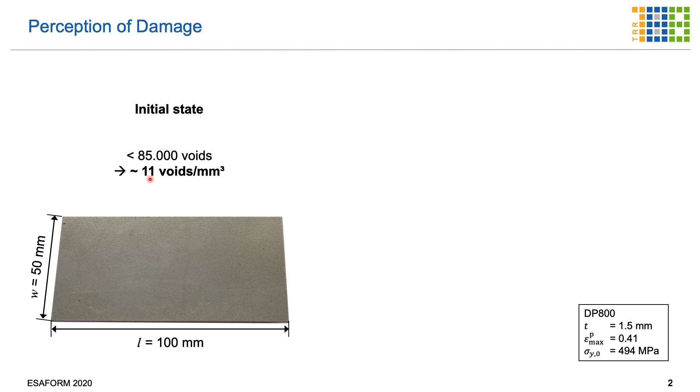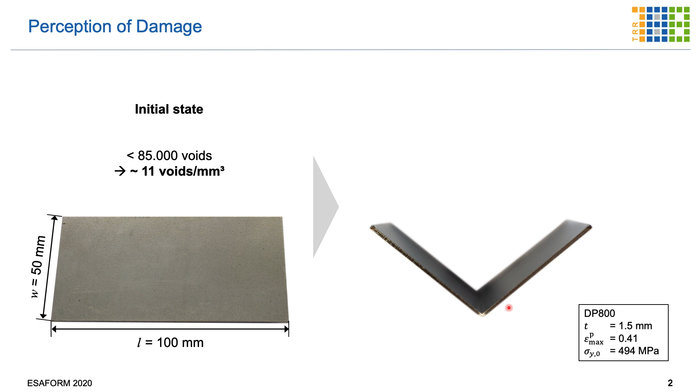Now the question is, what happens to those voids if you do metal forming? If you do, for instance, air bending, how many voids will be generated in the forming zone? The strain we generated in the experiment was 0.41. If you look at the forming zone, a tiny zone, you will find 27 million voids, corresponding to roughly 390,000 voids per millimeter cubed, just in the forming zone. This is 35,000 times more than at the initial starting point.

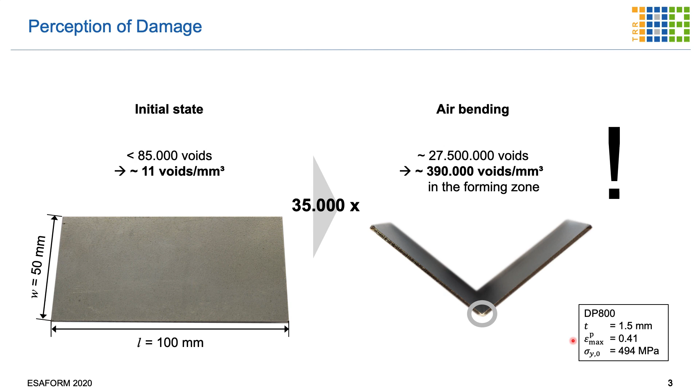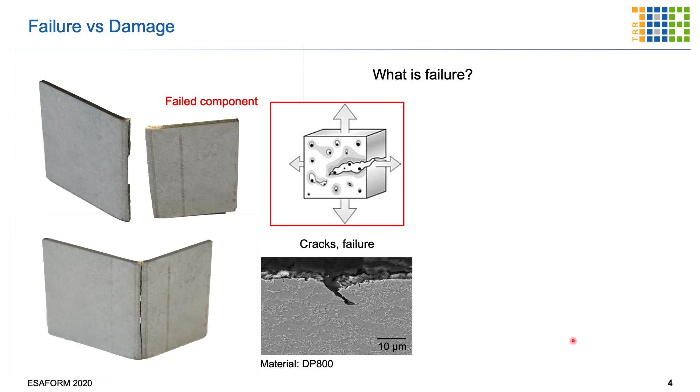So something happens here, and this is what we call the evolution of damage. At that point, I would like to emphasize the difference between damage and failure. Failure is when we observe macroscopic cracks that lead to the malfunctioning of the component, so the component has failed and cannot be used in service. This is what we understand by failure.

However, if we look at damage, we start with a material which might have some voids in it, but which might also have inhomogeneities such as precipitations, inclusions, or even second phases. As you start loading and plastically deforming, you see separation at those interfaces happen, and those voids grow with increasing plastic deformation.

At the end, those voids coalesce with neighboring voids and coalesce further until macroscopic fracture occurs. Our concern is up to this red line: this is the part of the material we consider to be a functional component. Although there are voids in it, although they coalesce, and although it's not in the initial state, this part is still a good part. In our example, we can find at the martensitic islands voids that grow with plastic deformation, as you see here very impressively.

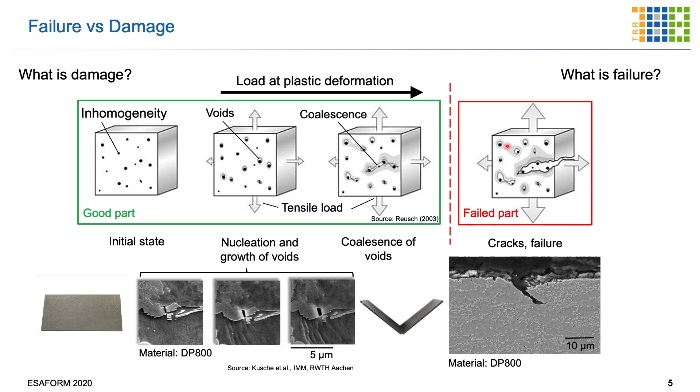In the end, our message, our mission, is: damage is not failure. So you might have damage in the part, and still it's a good part, but we are not looking at a part that goes to failure. Failure is the final stage of the evolution of damage.

So this brings us to a paradigm change in a way. The design process consists of getting input on material properties, the function of the component, the load in service, and then designing the geometry of the component from those, and then manufacturing the component. Now, the properties after manufacturing are usually not the same as the properties assumed at the beginning, so therefore you get a loss of safety margin.

You have a part with an unknown safety margin. You can improve that if you use the product properties after manufacturing in the design process. Then your safety margin will be much better, and it will be a deterministic safety margin. Until now, the properties considered after manufacturing are strain hardening and residual stresses. Damage, which I showed you before, is basically not considered. And that's what we would like to change in our research center.

The important message here is we would like to move from formability in forming, which looks for preventing cracks in forming, to usability—that means to produce good parts but with low damage value that have much better performance.

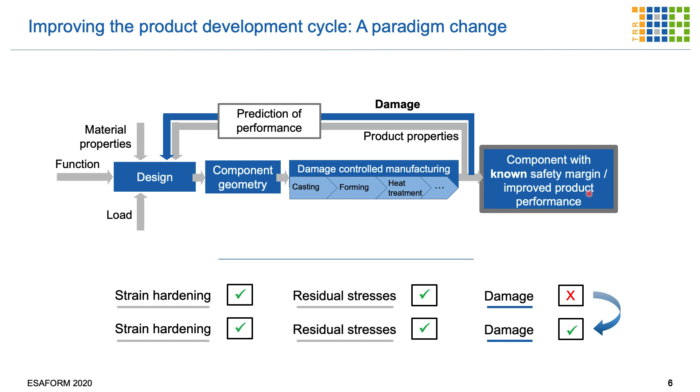Let's turn back to our first example with the bending. If we replace this air bending process with one where we superpose pressure during the bending process in the deformation zone, for instance by an elastomer cushion, we can reduce the voids from 27 million to 15 million during the forming process. It's the same product, same geometry, same material, but the voids are significantly less—about 45% less. Especially if you look at the density, which reduces from 390,000 to 210,000 voids per millimeter cube.

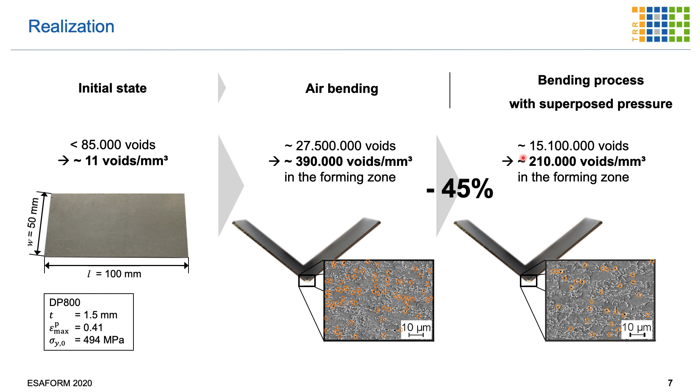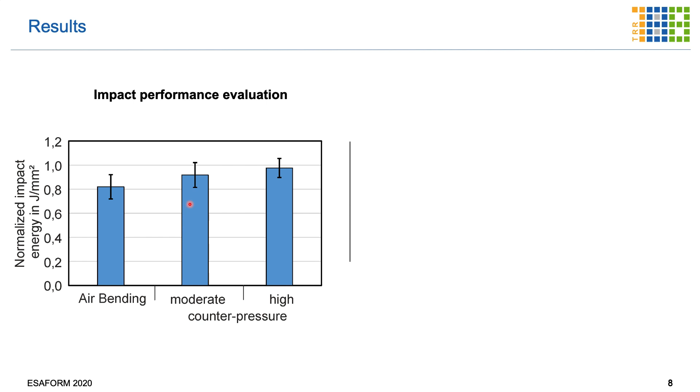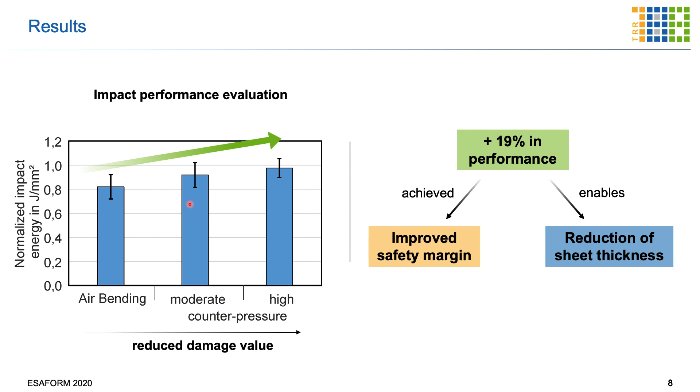So this is our mission, this is our vision of damage in metal forming.

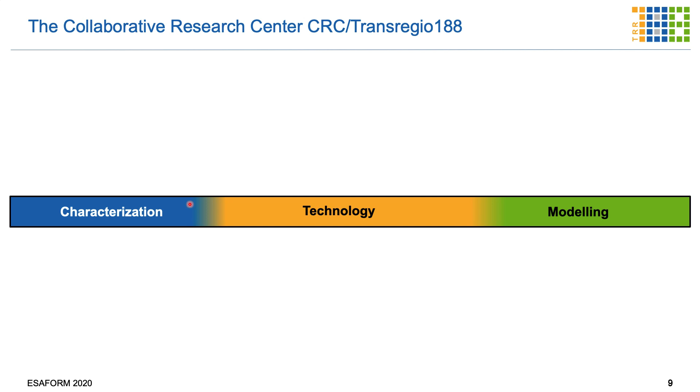The Collaborative Research Center, Transregio 188, has three fields of research within its body: the characterization field, the technology field, and the modeling field.

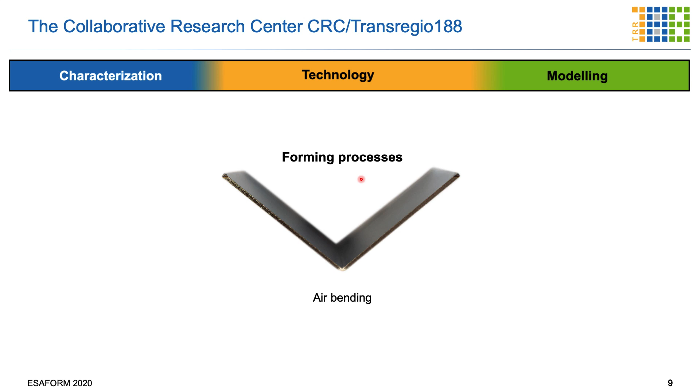In the technology field, we are concerned with the metal forming processes themselves, like air bending, extrusion, rolling, deep drawing, and similar processes. In the characterization area, we look at quantifying the damage level on a microscopic level, by measuring densities and so on, and at the same time we quantify the performance of the part. In the modeling field, our aim is to predict the development and evolution of damage during metal forming, but also predict the performance of damaged parts in service life.

So this is the global view of the activities of our research center, and I would like to give you a little bit deeper some findings of what we have achieved in the last 3 years.

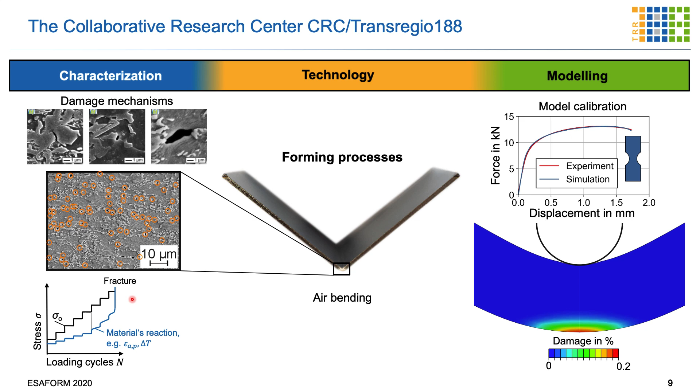Before I do that, let me introduce briefly the research team. We consist of four places in Germany: in Dortmund we have four institutes working together, in Aachen we have 5 institutes working together, in Cottbus 1 institute, and 1 department in the Max Planck Institute. Altogether we are 18 PhDs. We have 19 leading researchers—supervisors and senior researchers—and 14 industrial companies who support us in conducting the research and show us the industrial relevance of our research, giving us valuable guidelines.

The first funding period started in 2017. We are almost at the end of this first funding period, and what I will present today are some of the results and findings within the last 3 years.

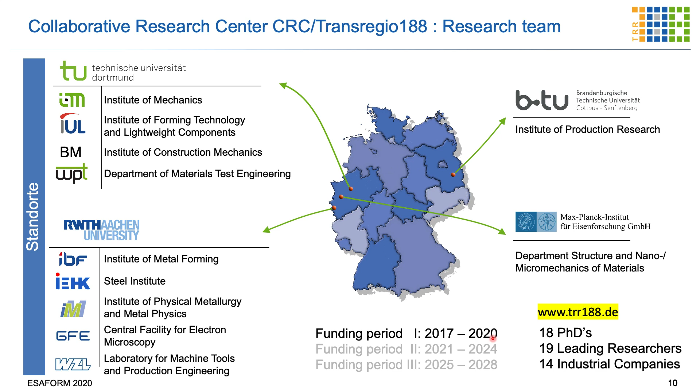Let us come first to the manufacturing of semi-finished products, which goes through the hot rolling and cold rolling routes and heat treatments. This is a typical forming route for sheet metals. We start with continuous casting, heating, hot rolling, cold rolling, heat treatment, and then the processes of bending, deep drawing, and so on start until we end up with the component and check its performance.

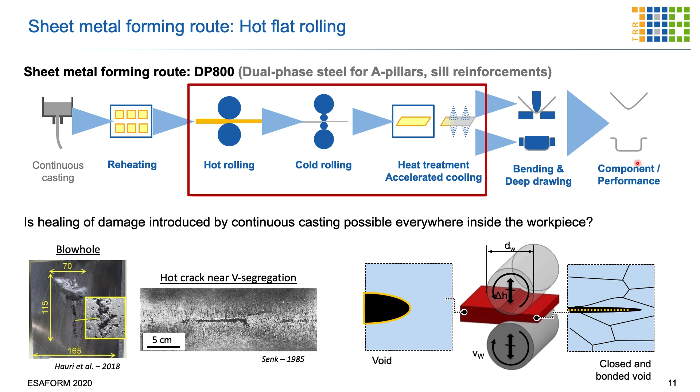In the field of flat rolling, we analyzed in the first period of our research how the voids which are inherently present after casting close during the rolling process. What we found is that the type of the voids we have after casting, their form, their direction, their orientation has an immense effect on the closure of those voids during the flat rolling process.

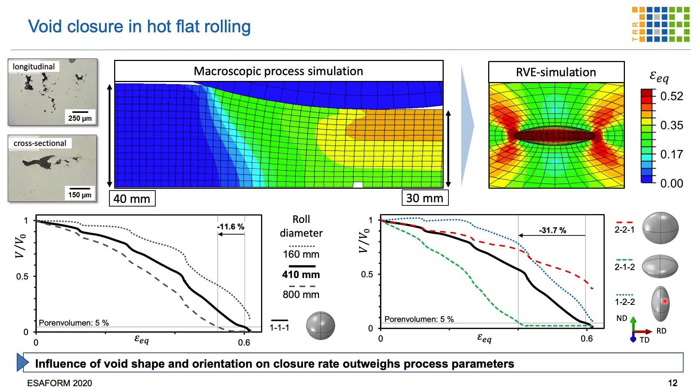And you see at the center you have a closure of that void to a certain extent. And in those graphs, with increasing strain we see different closure speeds of those voids depending on their geometry and depending on their orientation in the metal. So this was a very important finding for us.

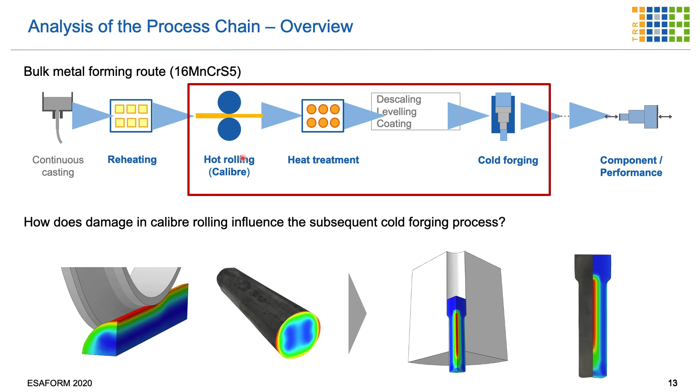In a second investigation, we looked to the bulk forming route, and in the bulk forming route we considered the hot rolling within a caliber rolling process. So what we did is we were searching for the amount of damage depending on the design of the caliber rolling process.

So we started with a rod which has 60 millimeters diameter and reduced it to the diameter of 40 millimeters, which was used then after in the cold forging process, and looked for different ways of designing the sequence of the calibers. Here you see different forms, and at the end the amount of void volume fraction in the part.

So, depending on which route you select and which geometry of the rolling tools you select, you end up with different damage distribution in the part. The volume void fraction is relatively low after the rolling process, which is a good sign for the process itself. So this was another important finding for us.

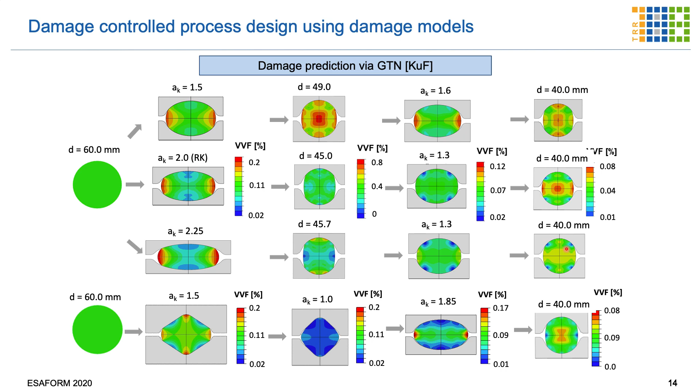Now, let me come to the component manufacturing. I would like to start with cold forging. The cold forging process is a very simple and fundamental process in bulk forming, where you start with a billet and push the billet with a punch through a die opening in order to obtain the extrudate.

The important process parameter here is the so-called extrusion strain, which is nothing else than the logarithm of the initial cross-section divided by the final cross-section A1. And interestingly, this strain is exactly the strain you get with local analysis at the center line of the extrudate.

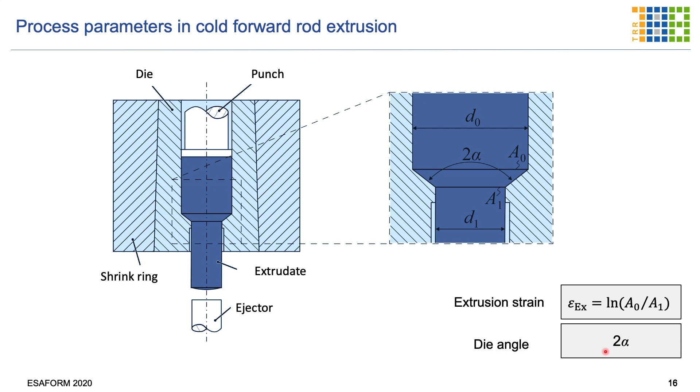And this strain is constant over a certain radius, so that we could take specimens out of this region and analyze them further. Another important parameter is the die angle, designated by 2 alpha, and I would like to show you now the experimental campaign which we have conducted.

So on the left you see for a material, 16 manganese chrome S5, which is a typical cold forging steel, we use different strains from 0.5 at the axis up to 1.5 logarithmic strains. So we are speaking here about very, very large logarithmic strains. And all of them for a constant die angle.

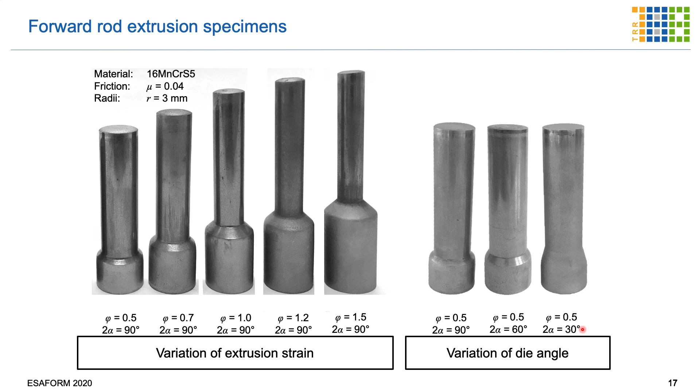And then, as an alternative, we produced a series of experiments with the same strain, that means with the same cross-sectional reduction, however with different angles of the die. And now let me show some results.

So what we found is, if we analyze the stress state and look for the triaxiality -- which is the hydrostatic stress divided by the equivalent stress, a measure of the first invariant in the stress tensor -- we see that for the same cross-sectional reduction, that means for the same plastic strain at the center, we get different triaxialities for different angles.

So with a 90-degree angle, we get the maximum triaxiality in the deformation zone as positive, which is 0.2, and we get a triaxiality of almost minus 0.3 for the smaller die angle of 30 degrees.

This is very important. And now we look to those three specimens and found that the density for the one with the highest hydrostatic pressure is highest. That means the voids which we have in the specimen closed very effectively, or didn't open at least.

And then for the case of the 90-degree angle where we have a positive triaxiality, we get a reduction of the density, which indicates that we have here damage nucleated and growing during the deformation process. So this is a very important result.

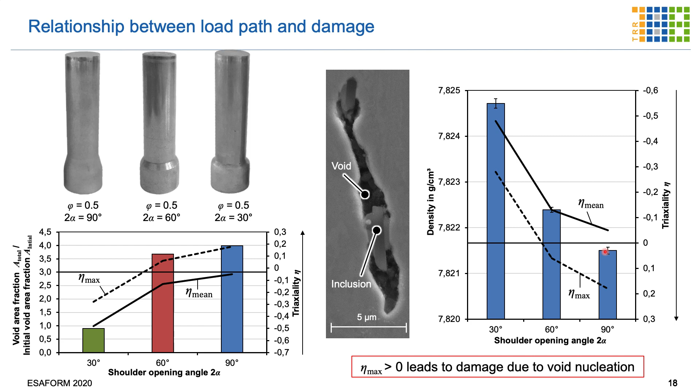As a next step, we analyze for those specimens the product performance, and for that purpose we use specimens out of the extrudate in the middle with almost uniform homogeneous material properties, and extract fatigue test specimens. We extract Charpy impact tests and we extract tensile test specimens to analyze the apparent Young's modulus.

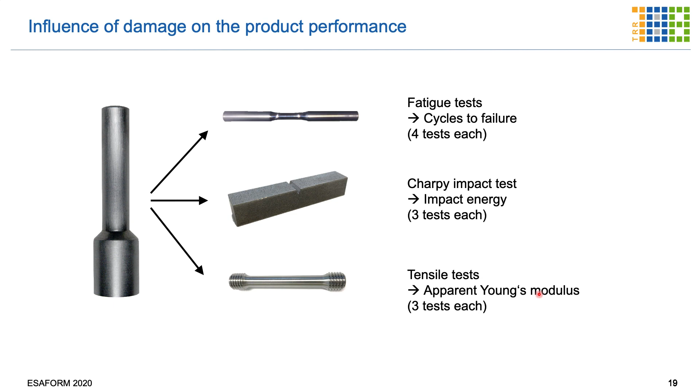And those are the results. So this is a quite crowded figure, so please concentrate on, for instance, the impact energy. That's this one for 30 degrees, where we have a maximum triaxiality, shown here, of a negative value 0.28.

For that, the impact energy is the highest, and the impact energy falls for the specimen with 90-degree angle for the same strain. So strain hardening is not the factor, and residual stresses are not the factor, because you have almost no residual stresses in the core of the part after extracting the specimen.

So at the end, we can show that the impact energy of this part improved with decreasing cone angle, improved with increasing triaxiality in the negative direction.

So then you have the apparent Young's modulus. It decreases with increasing cone angle, from about 195 gigapascal down to 185 gigapascal. So there is an apparent decrease in the Young's modulus, which means you have a loss of stiffness with increasing damage at 2 alpha 90 degrees. And the same for the fatigue life, as you can see here.

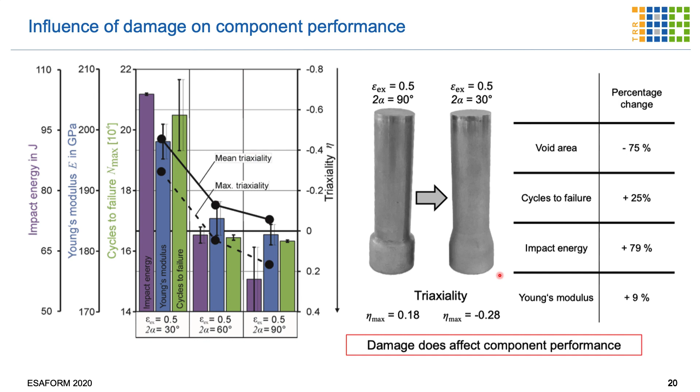I would like to show you another example from our findings in the field of air bending. We found that in air bending we cannot change the parameters like in extrusion by just playing with the bending parameters. The triaxiality doesn't change significantly, so we had to introduce another methodology, which was to apply external pressure during the process.

One very well-known procedure in industry is to use an elastic cushion for that purpose. But we found that this doesn't generate predictable pressure on one hand, and on the other hand, it does not generate high enough pressure for the process. So we invented a new bending process, where you see here the details.

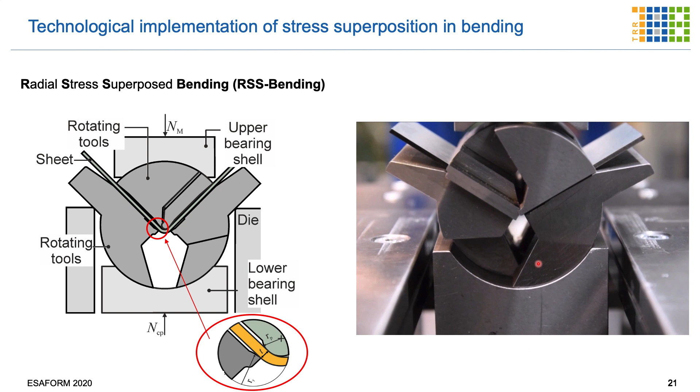So the dies are rotating. I will show you the slide in a minute. If you look closely to the contact area, we produced a pressure during the free bending action through that force on the lower die. And you see here the tool in action. That's the sheet, and you produce the pressure by pushing that lower die, ending up with a pressure superposed bending process.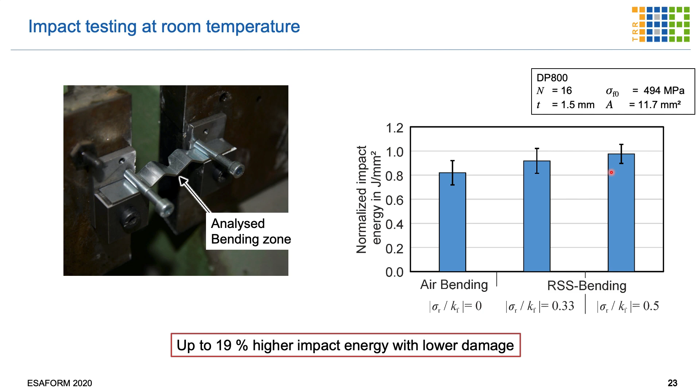What we found is that for a steel of DP800, we have an increase in the normalized impact energy with an increase of pressure. Here you see the approximate pressure values, where Kf is the flow stress. If we apply a pressure which is one-third of the flow stress, we have an increase in impact energy by almost 12%. And if we increase the pressure to half of the flow stress, we can increase that even by 20%. So this is a very important finding and a very clear message for the future of the design of metal forming processes.

Here is another example from the sheet metal forming part. This is from our colleagues from WZL in Aachen, the deep drawing process. What we try to do here is look at changing the load path during the forming of a part that looks like that from the blank. The blank is the same, the finished part is the same. What we change is whether we do it by one-step deep drawing, or by a multiple step drawing.

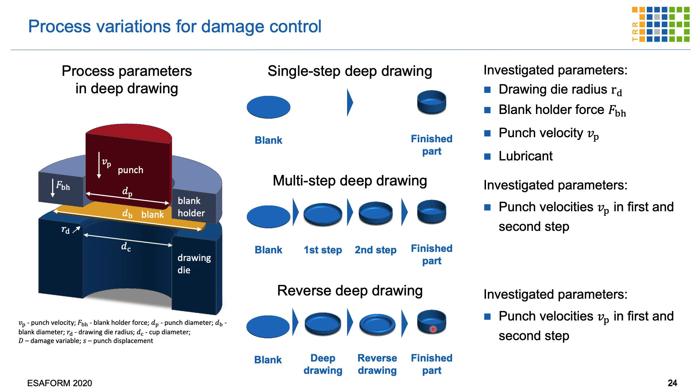So first draw one cap, then redraw it, and then redraw it again to end up with the finished part, or redraw by reverse deep drawing—deep draw one cap, redraw it in a reverse sense, and then redraw it again to end up with the same cup. Our hypothesis is that by changing the load path, we change the triaxiality, and by that the damage level in the part.

Here are the results. Now consider this right figure. This is the single-step deep drawing process, the multiple-step forward process, and the reverse multiple-step deep drawing process. What we see on these figures is the damage distribution, and you see that the multi-step process brings damage at a different location than the two other ones.

So this is the maximum damage in the wall at this point. However, if you use the reverse one, you get the maximum damage at another position in the wall, and if you use the single step process, you get the maximum damage at another position. More importantly, in the transition part where you have critical loadings of the part, the single step process delivers the worst damage compared to the two others.

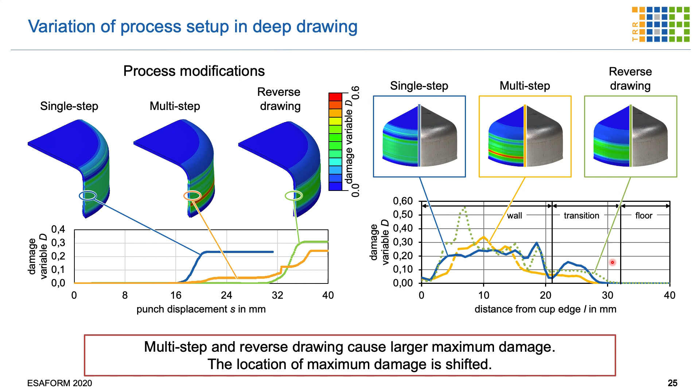So by that we could also prove our vision that we can change the product property damage in the part by changing the path of the loading.

Now, in the next slides, I would like to show you some results about our modeling and characterization. One important finding in our research center in the first period was that material property identification is an important issue. We found that if we use the classical strategy for damage models to identify material parameters by the load displacement curve or plus some strain values, you end up with damage values which are not in accordance with our experimentally measured damage values.

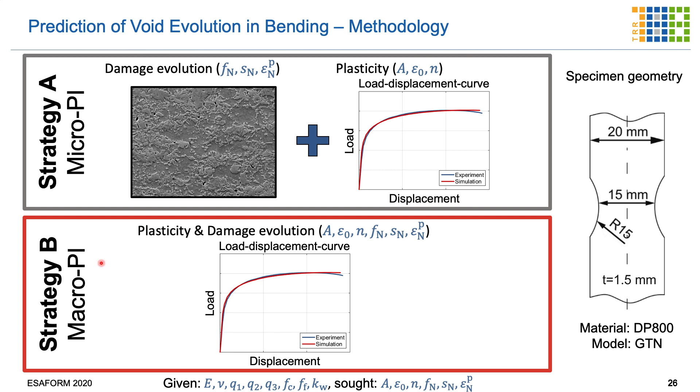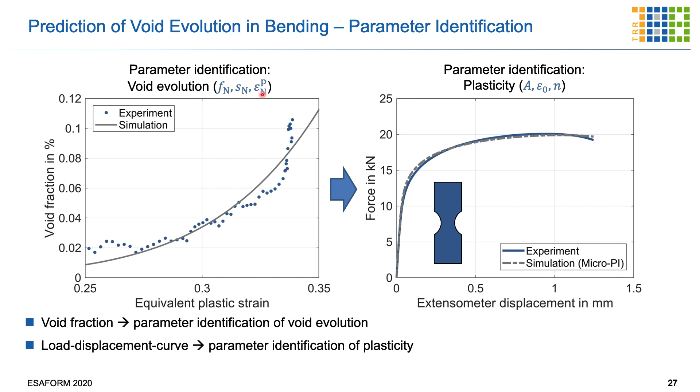And here you see the procedure. This is the parameter identification of the plasticity part of our model, where we identified the plasticity parameters, and this is the parameter identification strategy using the void fraction or the equivalent strain, identifying the void evolution parameters in a Gurson model. The results are shown here.

So if we consider the bending process with a macro parameter identification method, which is the classical one, and with the micro one, you get completely different void fraction distributions. As you can see here, the factor difference is 35.

Here is the distance from the outer radius, so we start at this point and go inside and measure the void fraction. If we use the macro parameter identification strategy, we get values - please notice the coordinate system is cut at this point, so you have a jump here to values of 7%. If we measure them experimentally, we measure values of 0.2%.

So there is a huge difference between the macroscopic parameter identification with the same model, the same Gurson model, just depending on how you determine the parameters of the model. And if we do it with our micro parameter identification procedure, we get not exactly the same as the experiment, but at least the order of magnitude is very similar to the experimental ones.

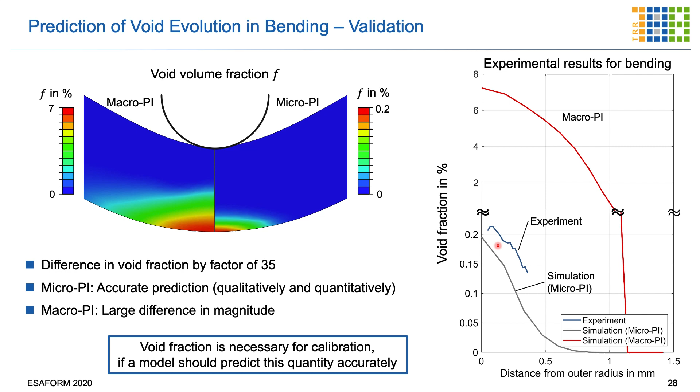So in the next slide, I would like to show you some interesting findings on how we try to identify the mechanisms of damage which we use to feed our models and design our models accordingly.

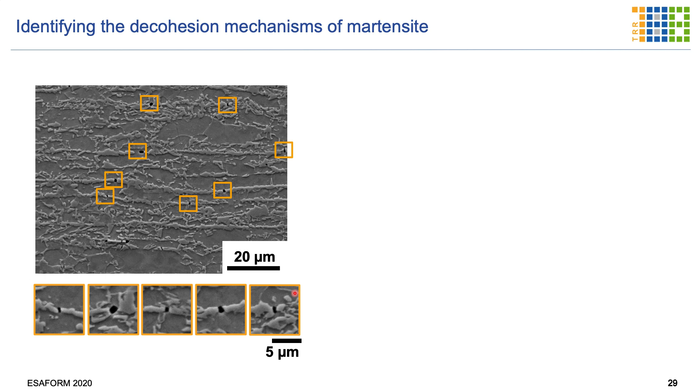So one example is about the decohesion mechanism of martensite. How do voids occur? You see here some voids. How do they occur by the decohesion of the martensite from the matrix? For that purpose, we look at the voids as shown here, different voids, and then analyze how those voids get larger and increase in size.

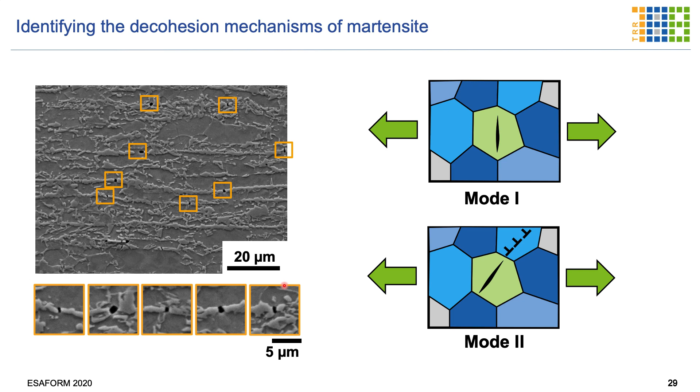So there are two modes, mode 1 and mode 2, and those two modes are important for our models. What we did was analyze those modes under the microscope and found that in the uniaxial tension test, this mode 1 direction, which corresponds to 90 degrees, this is the cracking angle, is the basic mode we have in the cracking of the martensite.

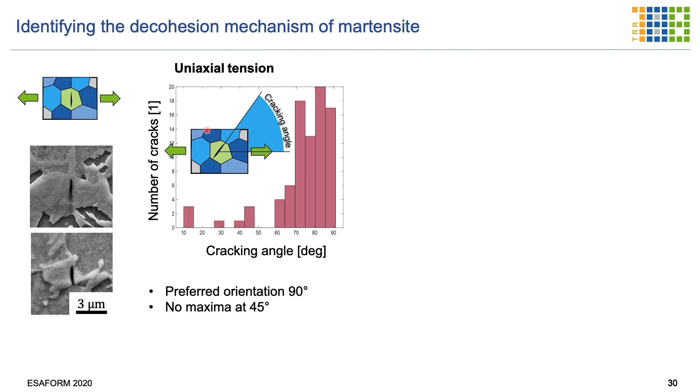Here is the angle once more shown. The preferred orientation for cracking in uniaxial tension is the 90-degree mode. If you look at equi-biaxial tension, the situation changes - then any angle, any orientation can be a cracking orientation. So it's very important that we identify those mechanisms in order to use them in our models.

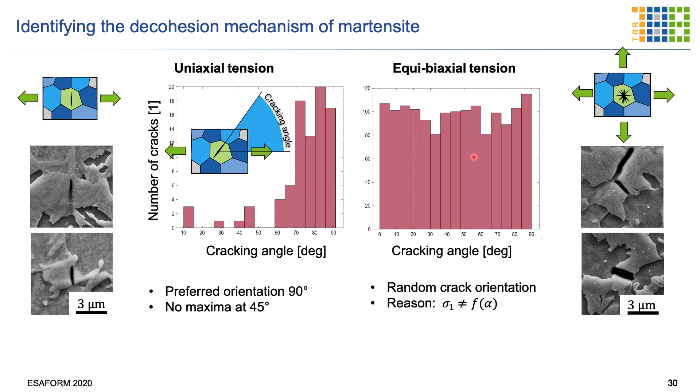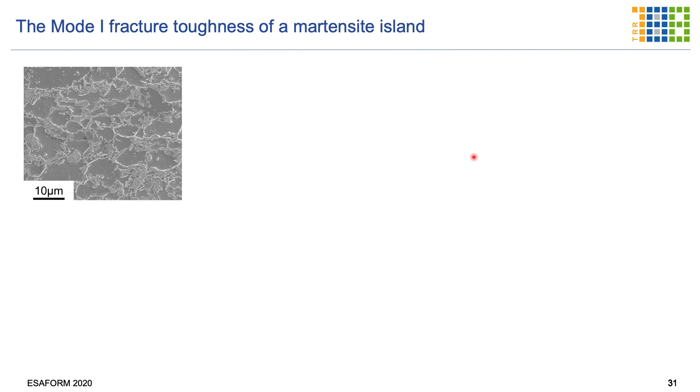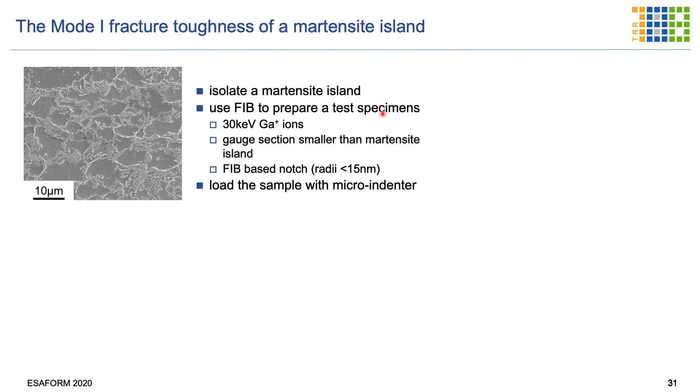Another example: what is the fracture toughness of a martensitic island? For that purpose, we look at a martensitic island under the microscope and then use the FIB technology to prepare a test specimen and then load that test specimen.

I have to show you the video here. You see, we isolate the martensitic island, prepare the specimen, and then initiate a crack, and then use bending tests, intermittent bending tests, to observe the crack propagation during that process, and found out of this the J integral, which is important, and also the stress intensity factor, which we can derive out of that for the martensitic islands.

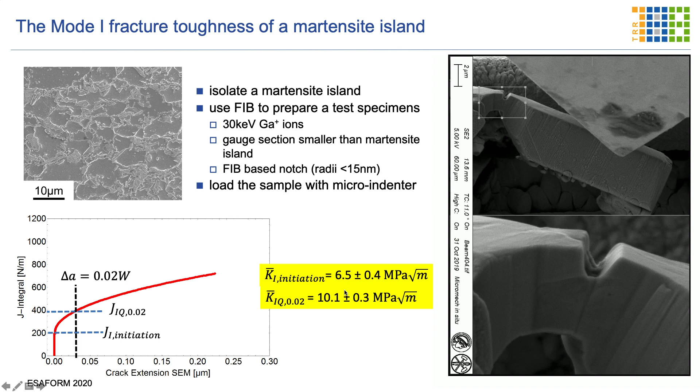Now, this is an average one because depending on the composition of the martensite, you get different values, and what we determined here is for the batch of different values, an average initiation, the stress concentration factor, and a stress concentration factor of a strain of 0.02. So this is very fundamental research which we can use directly in our models.

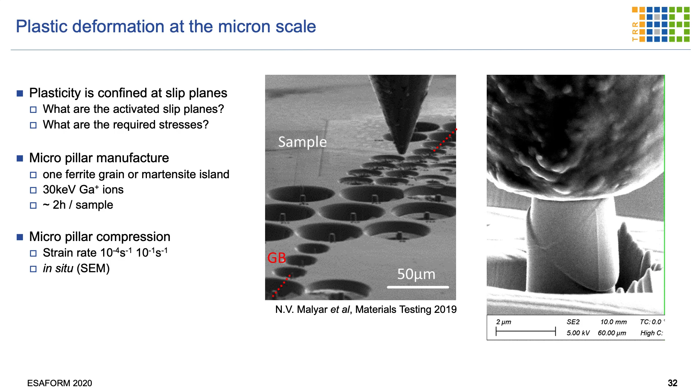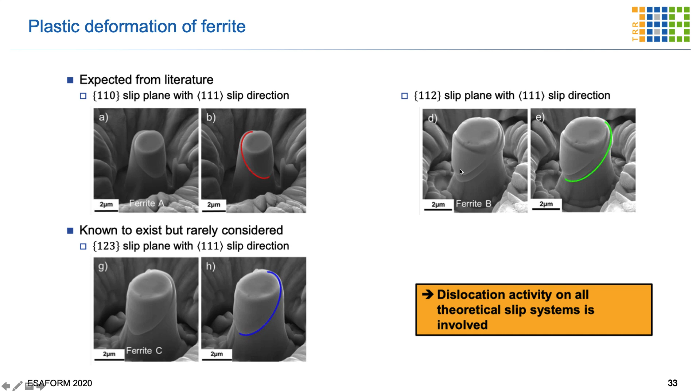Another important thing is to determine the plasticity properties, the plastic properties of our material. For that purpose, we used micro pillar compression tests and found the slip lines. An interesting result is, if you look to literature, you expect the 110 slip plane with the 111 slip direction as the typical slip system, but what we found is dislocation activity on all theoretical slip systems is involved in the plastic deformation of this material. So one very important result.

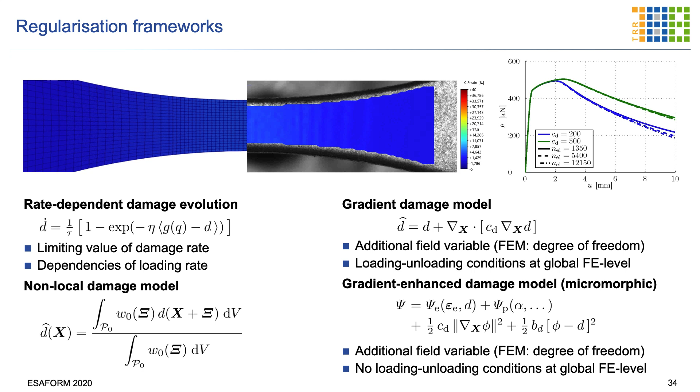With those, we went also to develop our macroscopic and multi-scale models. I'll give you an example for the macroscopic models. This is a gradient enhanced damage model, which has, beside the elastic and the plastic contributions, also a contribution for the gradient damage model. Our model has a very special property that all the parameters, the plasticity and the damage, are decoupled, so you can have a multi-surface analysis and determine in a very flexible way the properties of that model.

So this model is, as I said, a non-local model, and you see here for the bending case the effectiveness of this model. You see on one side a classical damage model. In that case, it was a Lemaitre model, where we have, depending on the mesh size, different damage values. And here you see the gradient enhanced damage model, and on the bottom the fine mesh, on the top the coarse mesh, and you have exactly the same damage distribution for that model.

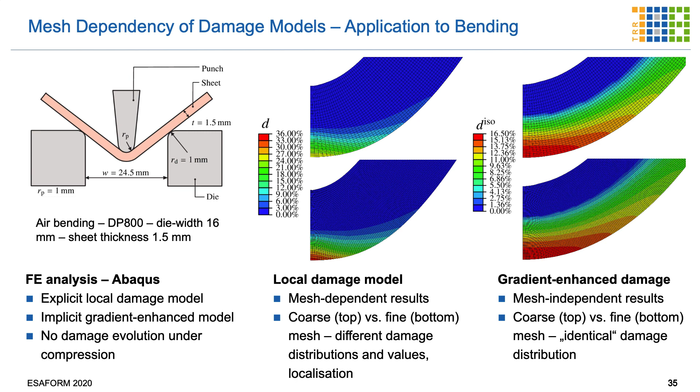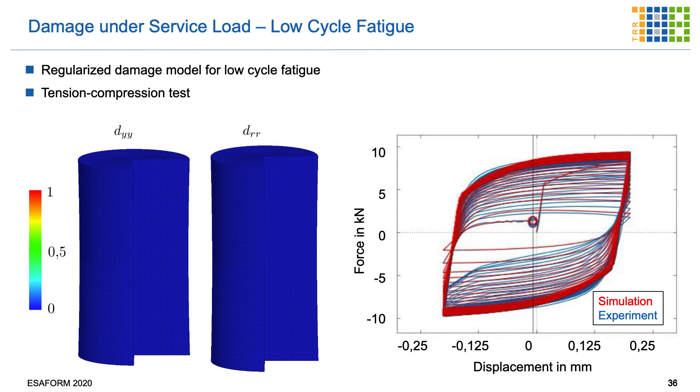So a final example from the computational side before I end my talk is related to the low cycle fatigue. Our models for low cycle fatigue are shown here, and what we see is in case of low cycle fatigue, our simulation and our experiments are both supplying an excellent comparison and predicting the effect of damage on the low cycle fatigue.

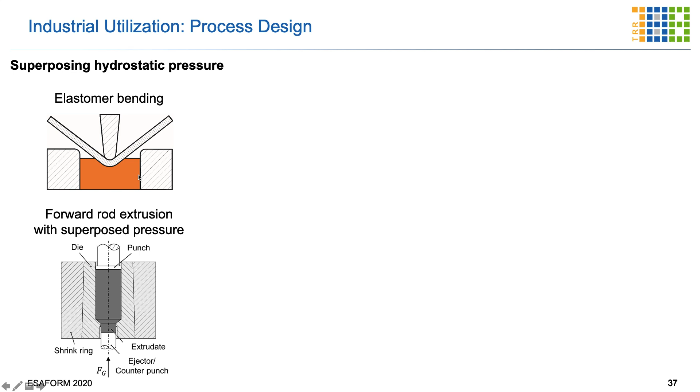So with that, I'm coming to the summary and to the important points. What are the industrial utilizations of our work? First of all, the process design can be influenced. We have shown that you can change the process design by introducing additional pressure. I haven't shown you the rod extrusion experiments, but also here, by imposing counter pressure, you can change the residuals, the damage state, and hence increase the performance of the part.

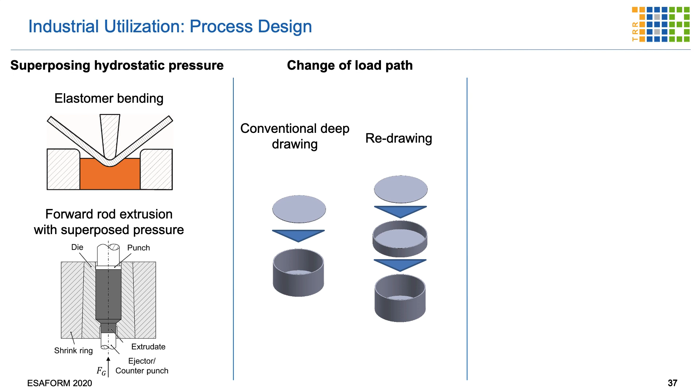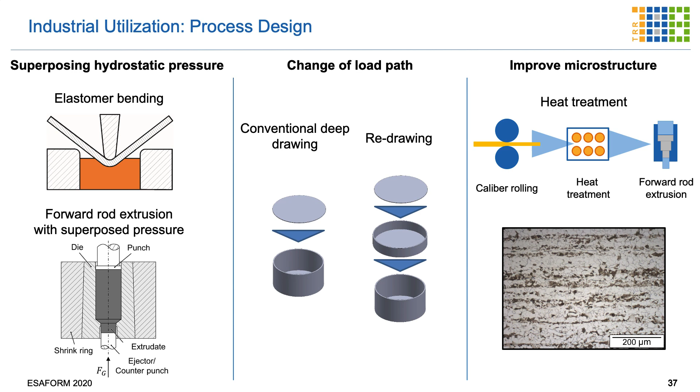We have shown that you can change the process design. For instance, in deep drawing, instead of conventional deep drawing, you can do redrawing and end up with a different damage distribution and hence different performance. What I haven't shown you as well is that you can improve the microstructure during the heat treatment and during the rolling, such that the microstructure is convenient to reduce the damage evolution in the process.

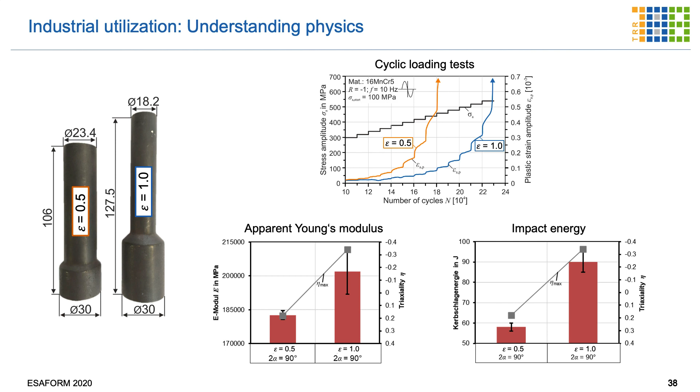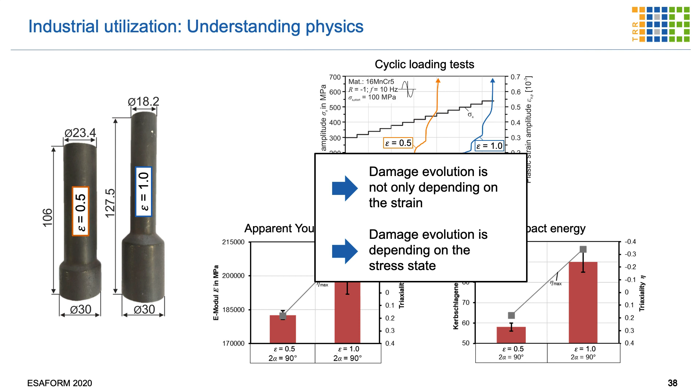Those are important findings. Another important finding for the industry is understanding the physics. We understood that we can change the damage evolution by the process parameters, and damage evolution is not only a function of strain, it's also especially a function of the stress state. So for small strains and large stresses, we get different product properties. Although the strains are larger, the damage in the larger part is lower. I haven't shown you that, but that's one important result we found in various works. So, depending on the damage evolution, we get different product performances, and those damage evolutions depend on the stress state. That's an important physical insight.

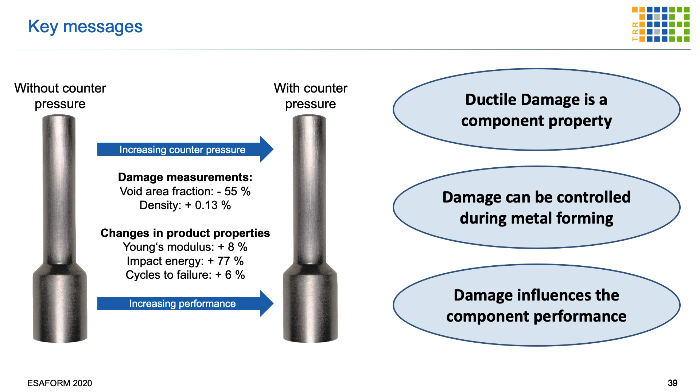And the key messages I can give you at the end: ductile damage is a component property. Damage during metal forming can be controlled by process parameters and process design. Damage influences the component performance significantly, as shown in this example with counterpressure and no counterpressure.